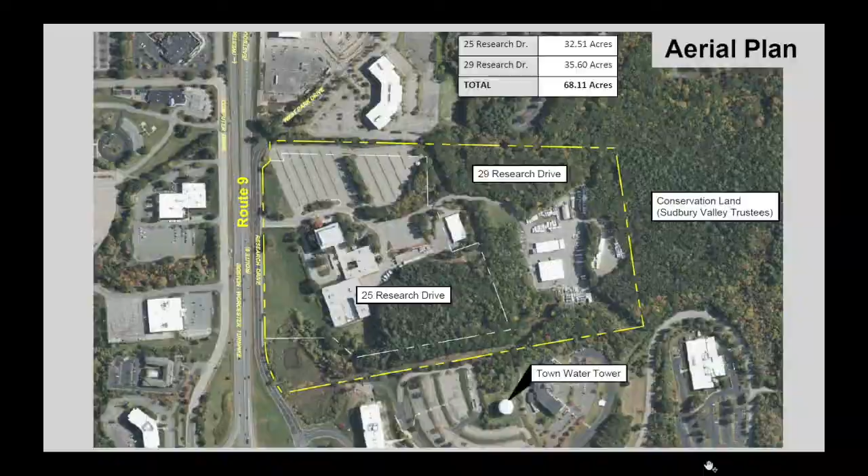So we're looking at a redevelopment plan where we'd be creating a state-of-the-art innovation campus. This innovation campus will house a mixture of uses: a combination of life science, research and development, GMP manufacturing, office and amenity space. The GMP manufacturing, or good manufacturing practice manufacturing, is a type of manufacturing that's highly regulated because of the type of work being done and the medicines being developed - the creation of medicines and gene therapies in a very highly controlled environment, meeting certain standards while being made and when it leaves the facility. It's a highly regulated, specialty type building and construction that would allow the right tenants to come in and develop these medicines and gene therapies.

So we looked at this site and set some goals. It's an interesting site with a lot of natural features by way of the topography and wooded areas that surround it. We looked at how to leverage those elements that exist, how to create a campus where people can come, work, and be inspired, and have spaces where they can truly sit and be collaborative and really research and develop the items we're talking about. It's about creating an environment and a place with connections between the buildings and uses that will be occupying that space, including access to amenity space common to those tenants.

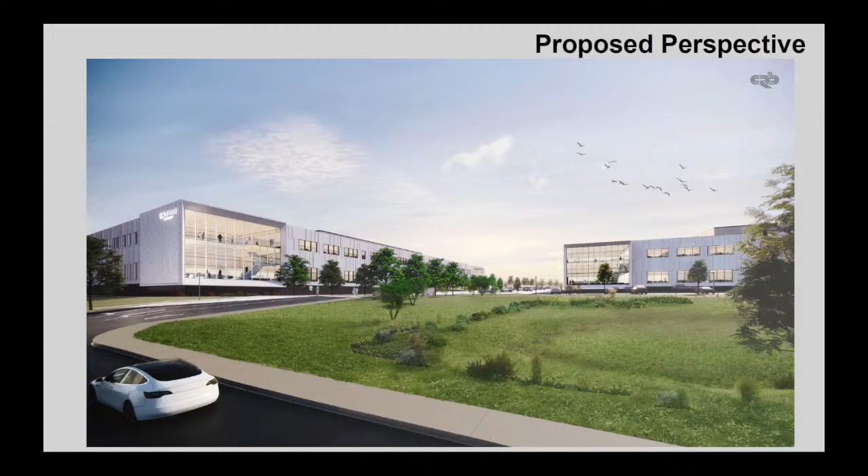So now we'll spend a few minutes talking through the project benefits. Certainly there are buildings on site that are old, built in the early 60s, not to a point you'd want for bringing in even new office tenants at this point. The buildings themselves are older, the infrastructure on site is also dated, and there are several other things in various states of repair that need work.

So this would, by way of the redevelopment with the new buildings and overall program, certainly be a big opportunity for additional tax revenue to come into the town. Also with this comes a wide range of jobs. So when you hear GMP manufacturing, it's not all people with PhDs working in these facilities, it's actually a range of people, so there are good, solid jobs for those with bachelor's degrees, associate's degrees, and PhDs. There's a wide range of jobs that would come online as part of this.

Again, we're looking at how we maintain and preserve a lot of the natural features. One of the big elements we'll spend a good chunk of time on, and some comments came actually when we were before the Conservation Commission that further elevated the review on drainage, is the drainage design. Right now this site has very little, it does have some drainage components, but it does not have a full system where you're collecting and treating it prior to discharge, and in some cases there are areas directly flowing into the wetlands. So we will walk you through the stormwater system design, and it's a significant improvement to the quality of the surrounding resource areas.

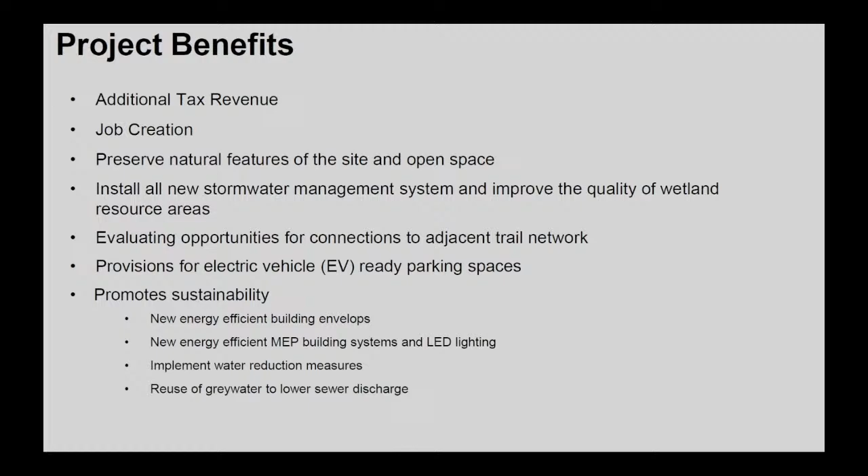On the front side, the BJ side, we have the buildings and the parking lots. The parking lots are in different states of repair, and again, they do not have all of the typical best management practices that go into today's standard for stormwater system design.

In the back, we have a combination of paved areas, gravel surfaces, and an operation where there is staging and storing, and then moving of equipment with large cranes.

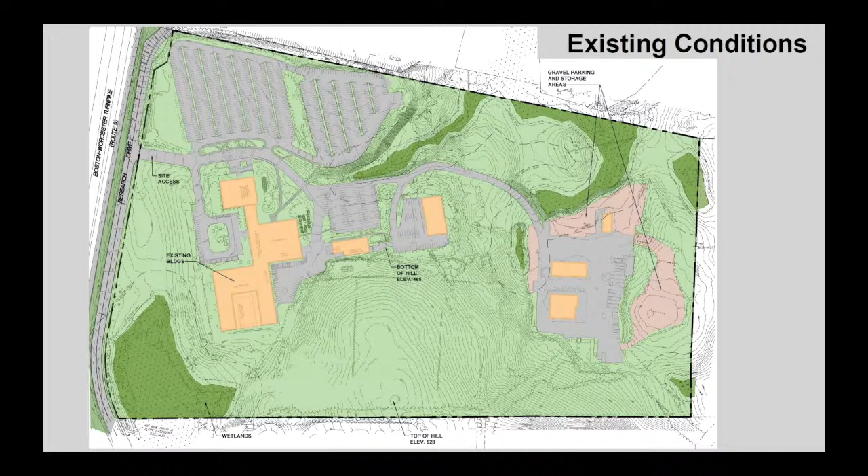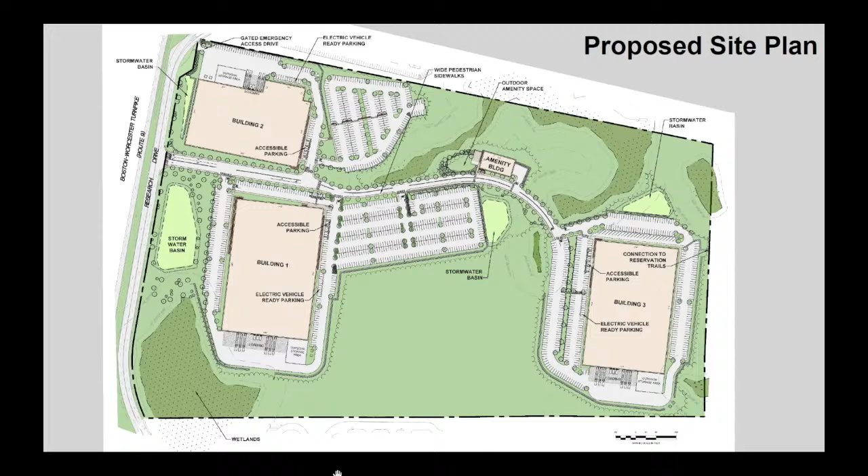I want to take a couple minutes and run through the zoning at a high level. We have the 2 parcels of land, 68 acres in total. They are both zoned General Industrial District, the IB district, and there is the Industrial D overlay, ID district. So we are looking at this as the industrial overlay district.

With that in mind, we comply with all the dimensional requirements that have been set. We comply with both frontage and all the setbacks by quite a bit. We actually have a detailed table in the plan set that was submitted. And then we wanted to highlight the maximum lot coverage — 60% is allowed, and we're only proposing 17%.

Some of that is utilizing and working with the natural features and preserving some of those wooded areas. We are required to have 40% open space; we're actually providing 57% open space. And on the building height, in the ID zone you can go up to 95 feet. We're only looking at a 50-foot high building, or really the 3 main buildings that would be 50 feet high.

And then on the parking side of the equation, we did run through and evaluate and used all the appropriate ratios based on the town's requirements. We are complying with zoning and providing a total of 1,415 spaces. Generally that's 2 per 1,000, but you can look at the backup and it's broken down to equate to the office research development parking requirements and then the industrial parking requirements based on employees per shift.

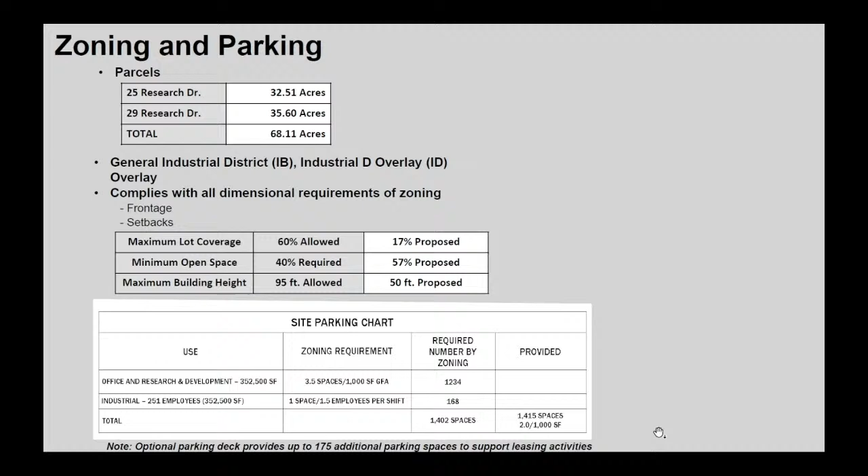Right now on site, I think there's approximately 1,045 spaces, so there is an increase in the overall parking. And then we did layer into this, and this was also in the package that was submitted, some discussions early on about how we could submit an optional parking deck as part of this.

This really, for us, when we go out and we're actively leasing these buildings and trying to bring in the right tenants, provides flexibility. Should we need to provide some additional parking, we can, and we're going to be exceeding the town's parking requirements.

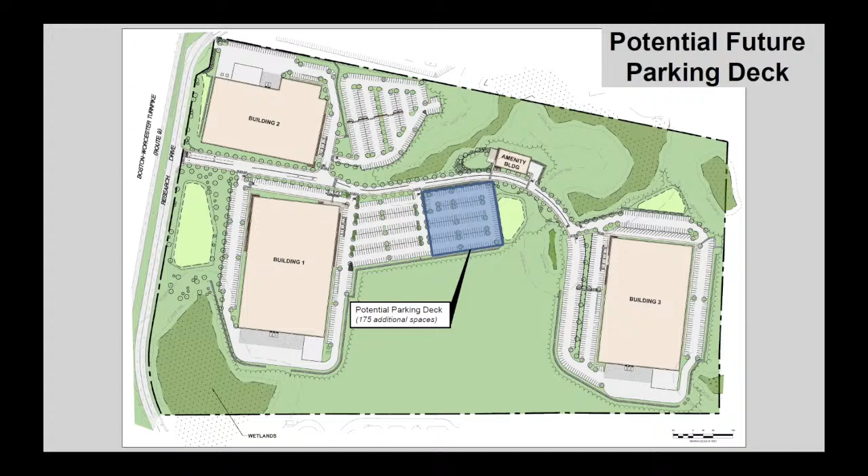Now we're going to get into the engineering design review in a bit more detail. So I want to ask Brian McCarthy from R.J. O'Connell to come up and join me. Good evening, Brian McCarthy with R.J. O'Connell and Associates, the civil engineers for the project.

Several areas of the site discharge directly to the wetlands resource areas without any water quality treatment prior to that discharge. Some of the runoff from the site actually sheet flows across paved areas and gravel areas directly into the wetlands. Some of these discharge locations lack erosion control devices and flow dissipators, so you can see some erosion that occurs out there today.

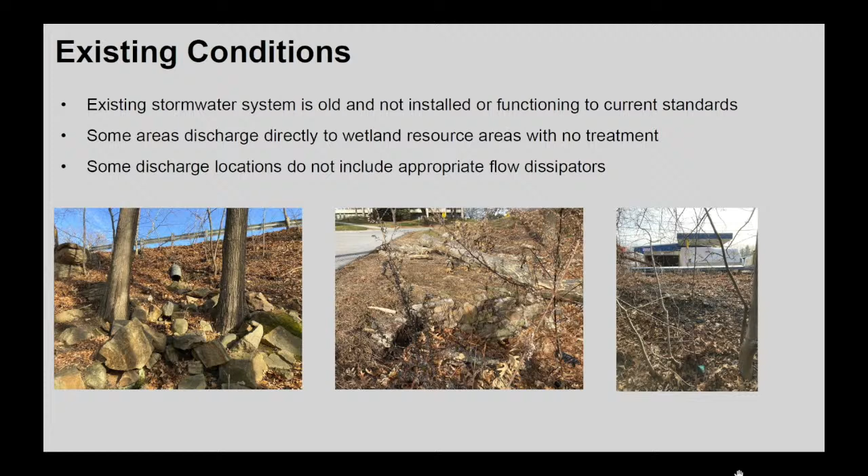So this slide outlines the key benefits and features of the new stormwater management system. It's a completely new system, everything on site will be replaced with it, and it's designed in compliance with the Massachusetts DEP Stormwater Handbook and the Town of Westborough Stormwater Management and Erosion Control Bylaw.

The stormwater management design includes best management practices to mitigate peak stormwater runoff from the site, provide water quality treatment, and provide a significant amount of groundwater recharge, which doesn't exist today. To accomplish this, we have a list of devices shown on this slide.

These include deep sump catch basins with oil trap hoods, water quality treatment structures with proprietary hydrodynamic particle separators, and in the subsurface systems there will be isolator rows that provide water quality treatment in those systems.

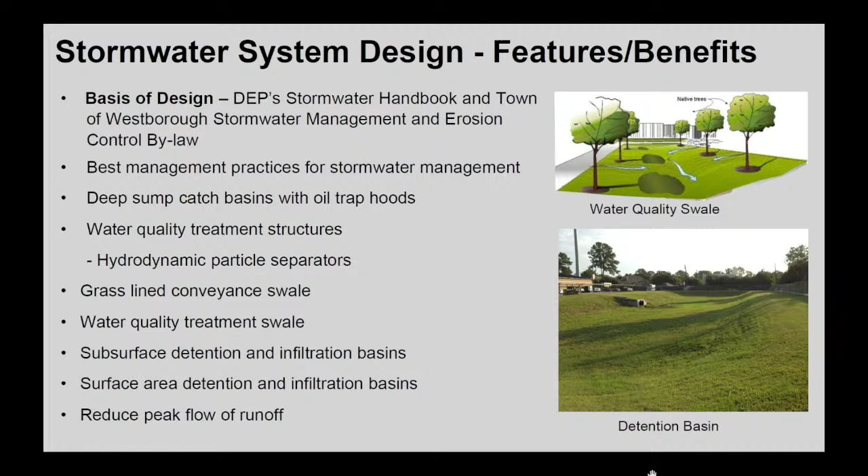So the design of the system basically amounts to reducing the peak flow of runoff from the site and providing significantly more water quality treatment, as none exists out there today.

The design of this system is based on an analysis and study of the existing drainage system out there today. It takes into account the amount of impervious area and open space today compared to the proposed project, as well as the current runoff locations and where water is flowing today. There are several of those locations, including 2 connections out to Research Drive and several locations to the on-site wetlands. So we've got stormwater flows to various locations throughout the site.

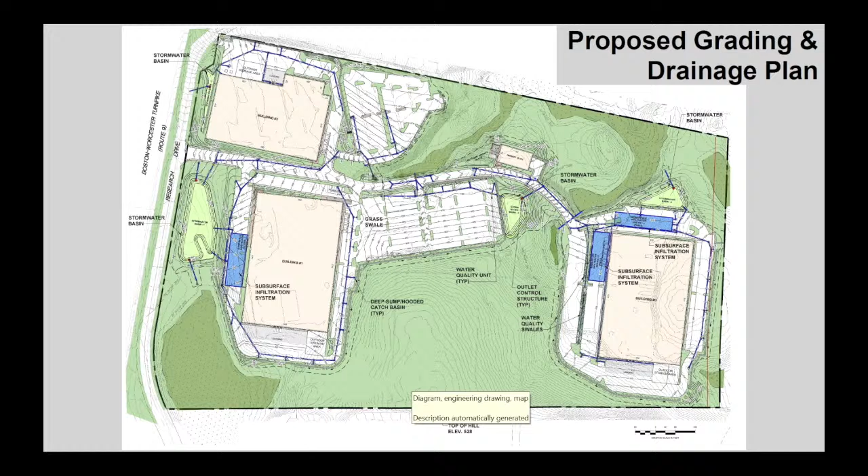The basin locations are spread out throughout the site, which allows groundwater recharge to also be spread throughout the site, as opposed to locating basins in one or two locations and concentrating that recharge. This design actually provides significantly more groundwater recharge than required by the DEP standards.

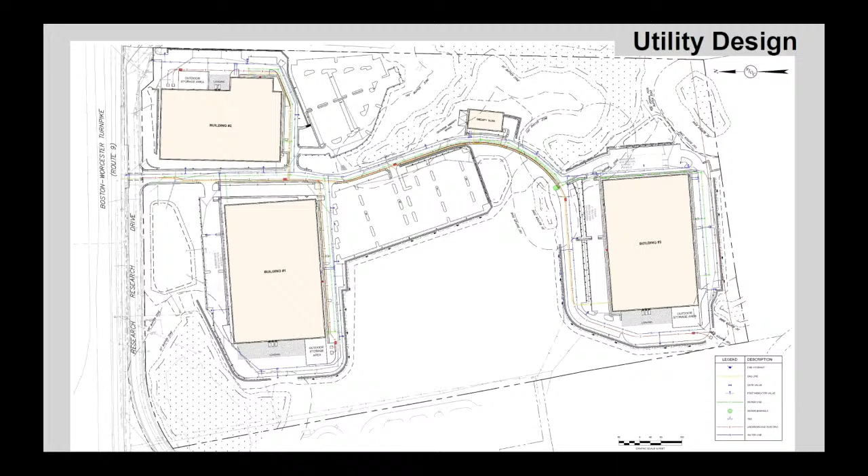So now, Brian, you can step out. Hillary's going to join me. She's with Michael D'Angelo Landscape Architects, and she's going to run through the overall landscape design.

Hello. So our planting approach is to have a variety of 8 different street trees within different zones, consistent within each zone. We have 3 zones along the main drive, and each parking lot has its own type of street tree, which helps prevent monoculture.

We're also proposing evergreen screening along the storage area and loading dock of Building 2, and ornamental understory plantings along the building facades. Our plant palette is majority native and also drought and salt resistant. We're proposing a flowering meadow mix where there are steeper slopes, as well as a low maintenance mix for the stormwater basins and bioswales.

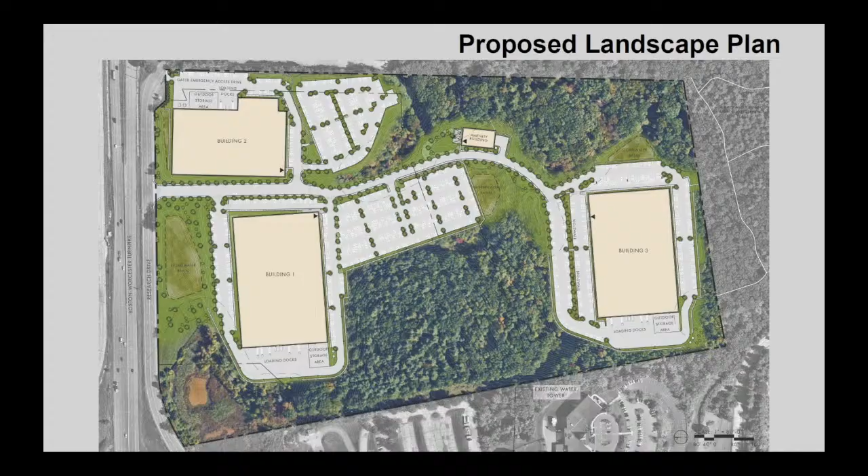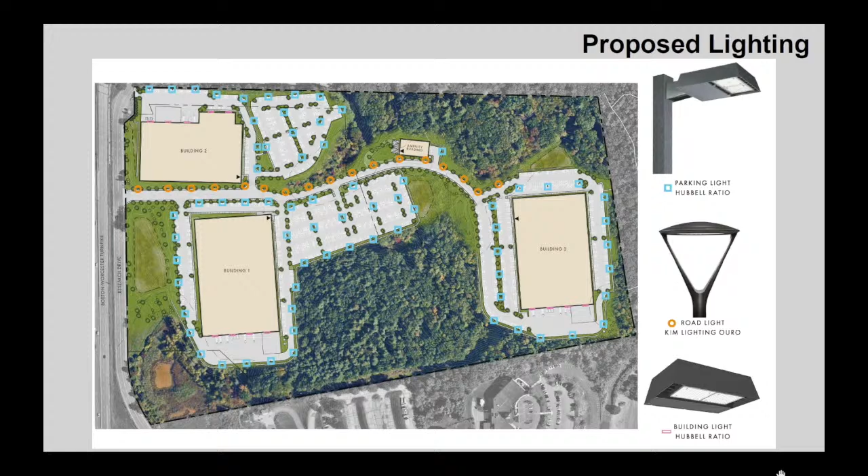Great, thank you, Hillary. So now we're going to jump on to transportation design review. So I'd ask Scott Thornton from Vanasse & Associates to come up and join me.

Good evening, Mr. Chairman, members of the board. Scott Thornton with Vanasse & Associates. Pleased to be here in front of you again.

So we prepared a traffic study consistent with state and local guidelines. We looked at 7 intersections in close proximity to the site that we would expect to experience the impact of the additional project traffic. The graphic in front of you indicates the site location, and those intersections studied were rotated 90 degrees from the site plan.

But you can see we've got the intersections of the Route 9 westbound ramps with Computer Drive, Connector Road with Research Drive with the Route 9 eastbound ramps, Friberg Parkway with Research Drive, the site driveway intersection with Research Drive, and down to the south, the intersection of Flanders Road with Connector Road and two future intersection locations with 129 and 133 Flanders Road, and the proposed extension of West Park Drive, proposed as a condition associated with Westborough Office Park.

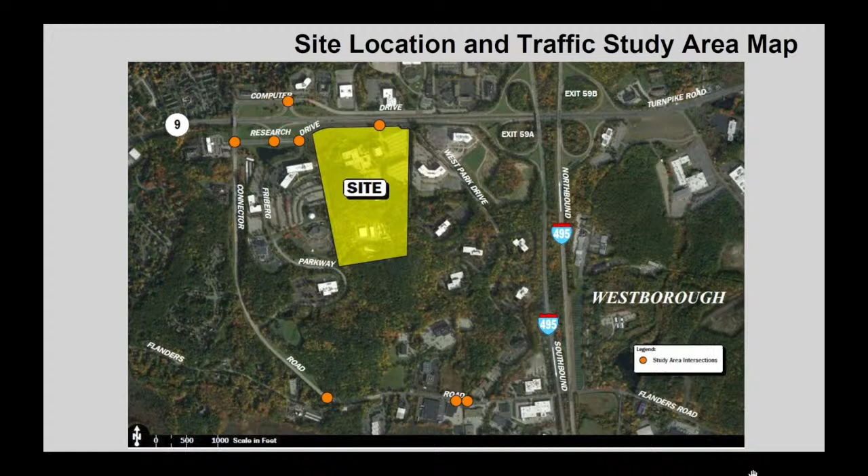In terms of traffic volumes, base information, we collected the traffic counts for this study in January of 2022. We applied seasonal correction factors of 16%, and also applied COVID adjustment factors between 41 and 37% on a peak hour basis. We've seen traffic volumes start to return to pre-pandemic conditions, but they're not quite there yet.

This slide shows the area traffic volumes just for some context to what's there currently, and these are all 2021 volumes pulled from the Mass DOT record system. Route 9 carries about 51,000 vehicles per day. Route 495 carries about 86,000 vehicles per day. And Flanders Road and Connector Road are much lower, carrying about 6,400 to 6,500 vehicles per day.

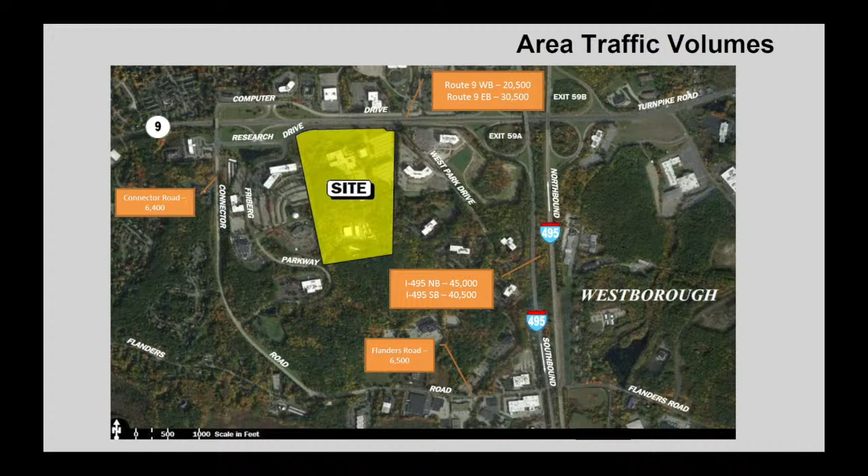In terms of the traffic study itself, we looked at existing conditions, including crash data, vehicle speeds, and sight distances for the site driveway intersection onto Research Drive. For future conditions, we also looked at background development, any roadway projects, and any other development that is approved but not yet constructed in the area.

So the next slide shows the net new site trip generation. What we did for this analysis was to look at what the current site generates during the critical time periods, weekday morning and weekday evening peak hours. And then we applied some trip generation calculations for the proposed site.

Because the GMP use is a relatively new use, there's no specific data for ITE. So what we're doing is really treating the uses integrated in a GMP development as discrete uses. You may have an employee that goes from the office facility to the manufacturing facility to the lab facility, and that's one employee, but the way we estimated the trips, we estimated them as if they were in different silos - office employees and warehouse employees, or manufacturing employees and lab employees. It's a conservative treatment, an estimate of the trip generation.

But anyway, we applied those trip generation estimates for the proposed site to the existing site trips, and came up with the net new trips expected to be generated by the development: 238 additional trips during the morning peak hour, 275 trips during the evening peak hour. And we distributed those trips out onto the study area network.

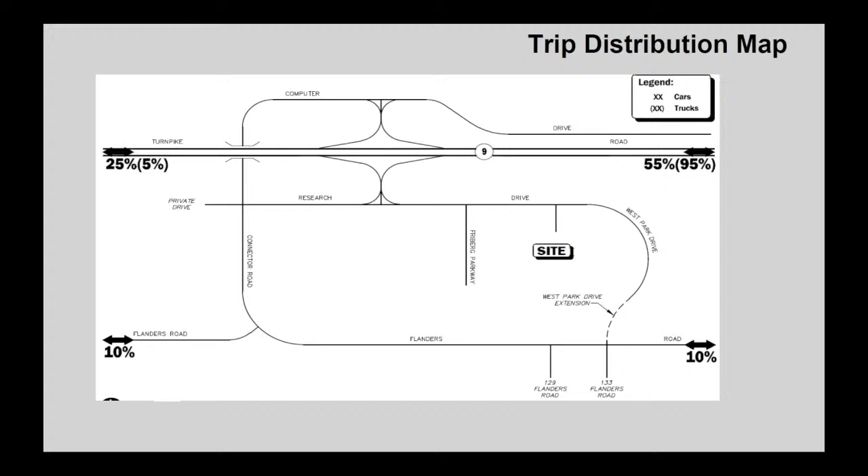So we did the impact analysis to identify the relative impact of the project with the net new traffic generation. What we found was really just 2 locations where there was a significant decrease in operations due to the project: the intersection of Research Drive with the Route 9 eastbound ramps, and also the Research Drive intersection with Connector Road. Those are shown on the next slide.

What we're anticipating is that we can address those decreases in operations with optimization of signal timing. In both cases, it's a westbound traffic movement that gets affected, during the evening time period when traffic is exiting the site. We anticipate that by reallocating some green time with those traffic signals, we can return the overall operations at the intersections back to a no-build condition.

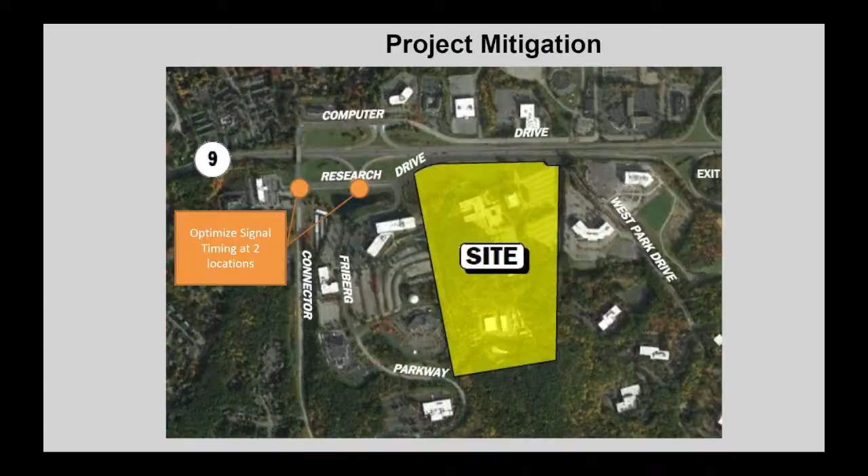So in terms of project mitigation, there's the optimization at these two locations. There's also a proposed TDM program to address ways to get people out of commuting by themselves in single occupancy vehicle trips. The applicant is committed to providing a transportation coordinator with information on commuting options, which could include a rideshare program for carpools, providing amenities to discourage off-site trips, and also providing pedestrian and bicycle accommodations on site.

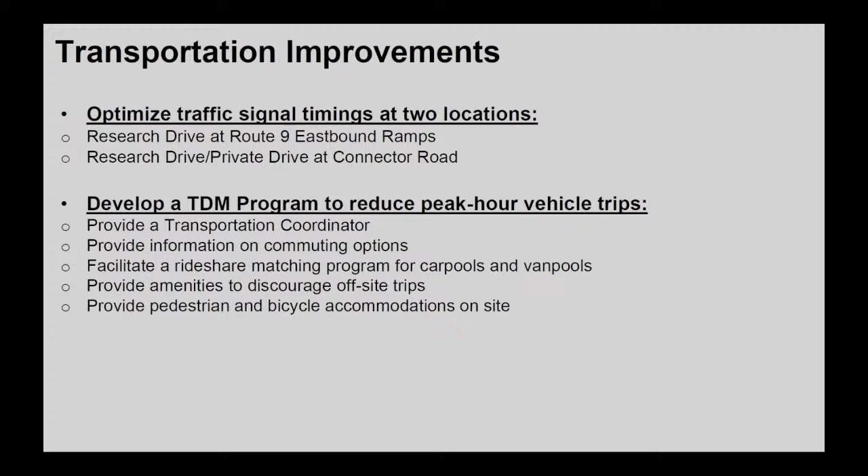We did receive comments from MDM, from the traffic consultant. There's a lot of information that they have requested. We have reached out to the Westborough Police Department for some details on crash reports, and they are working on it. We got word today that they are working on that request, but we anticipate a full response to the MDM comments probably in the next couple of weeks.

So other than that, turn it back over to Mike. Great, thank you, Scott. So that concludes the presentation portion of it. We're going to stop here and turn it back over to the board for Q&A. And if Marshall, you could join me again.